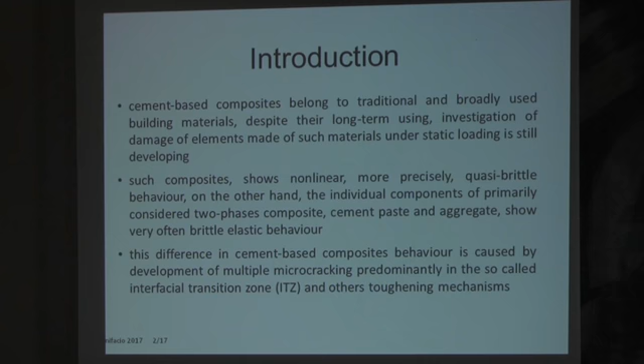So, about the experiments. For the study, we selected two fine-grained cement-based composites. In the table, you can see the composition of these two composites. The composition was the same in the amount of aggregate, in this case only normalized quartz sand with maximum grain size of 2 millimeters, and the binder is the cement. The amount is the same in both mixtures. The difference is in the water to cement ratio, and the second mixture also contains the superplasticizer admixture. You can also see the basic parameters of the fresh mixture, workability and bulk density of these materials.

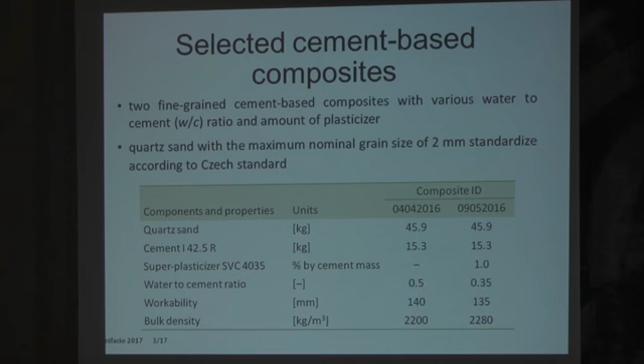From these mixtures, we prepared the specimens. The dimensions of the specimens were 60 by 80 millimeters in cross section and 1 meter in length. These specimens were primarily used for the measurement of length changes, the shrinkage measurements in these composites. After the shrinkage values were constant or did not change so much, approximately after 90 days, we got from these specimens specimens of dimension 40 by 40 by 160 millimeters, typical beam specimens which are used for fracture testing of fine-grained composites.

These specimens were provided before testing with a central edge notch, with notch depth approximately 1/3 of the width of the specimens. This notch was in the center of the span, and the span length was 120 millimeters. As I told, fracture tests were performed on these specimens. It was a fracture test in 3-point bending configuration, and the tests were under displacement control loading.

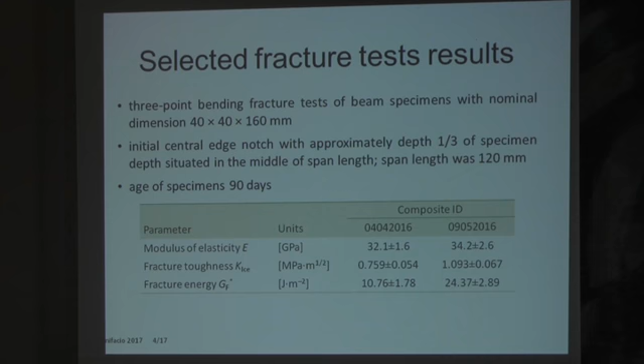It means we can record the load-deflection diagrams of these experiments, and these diagrams were evaluated. From the first almost linear part of this diagram, we estimate the value of modulus of elasticity, then using the effective crack approach we determine effective fracture toughness, and using the work of fracture value we determine the fracture energy. In the table you can see the values of these parameters, the mean values and standard deviation of 6 specimens for each mixture.

After the fracture tests were performed, we took the fracture surfaces of the specimens, and we performed microscopic measurements to look at the microstructure of the materials, mainly at the interface between matrix and aggregate. It was performed by scanning electron microscopy. You can see the pictures for both materials. It's by detection of secondary electrons, and the magnification is 5,000 times.

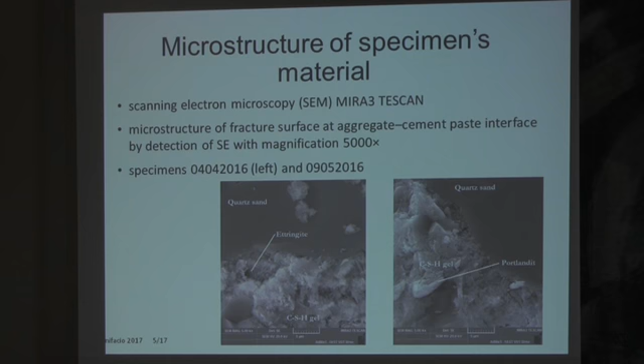You can see the quartz sand as the aggregate, and then you can see the interface. You can see the basic minerals which are in this area around the aggregate: ettringite, portlandite, and CSH gel. So, something about the interfacial transition zone. We focus on this part between aggregate and matrix. On the left picture, you can see a picture from literature. There is the aggregate, there is the interfacial zone, and then the cement matrix. So we are focused on this part, the part between the aggregate and the matrix.

So the other advantage of the microstructure measurement is that we can measure the distances, also in 2D, but we can use it. You can see on this picture, I hope. This is the grain of aggregate, some larger grain of aggregate. It's not so easy to define a constant thickness of the ITZ, because as you can see from the micrographs, there are different structures around the grain, and it's not so ideal as in this picture, where there is a constant thickness of ITZ.

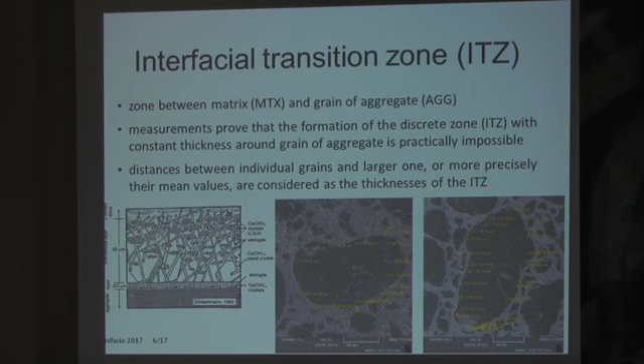So now something about the modeling of the interface between matrix, ITZ and aggregate. It was performed by software ANSYS. It was made a simplified 2D model which goes from the three-point bending geometry. In this geometry was tested our specimen, and the crack tip is on the interface between matrix and ITZ.

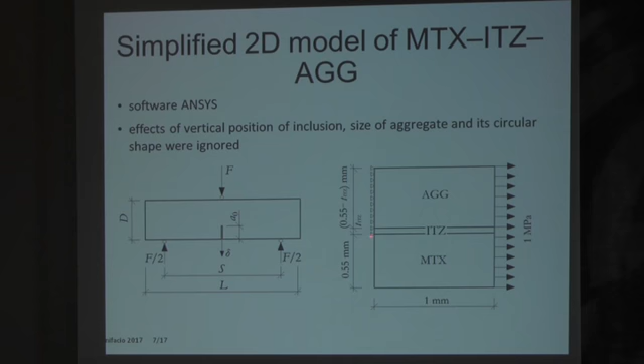It means when we loaded the specimen, the crack grows from the initial notch, goes to the matrix, and we model the interface between matrix and ITZ. So the materials were considered as linear, elastic, and isotropic. They were defined by their elastic constants, Young's modulus, and Poisson ratio. As I told you, the thickness of ITZ was taken into account from the microscopic measurements.

The modulus of elasticity of matrix was taken from the fracture experiments which we performed, and modulus of elasticity of ITZ was determined using so-called generalized self-consistent scheme. It was taken as half of modulus of elasticity of matrix. Modulus of elasticity of aggregate was taken from literature, and also the Poisson ratios for materials were taken from the literature.

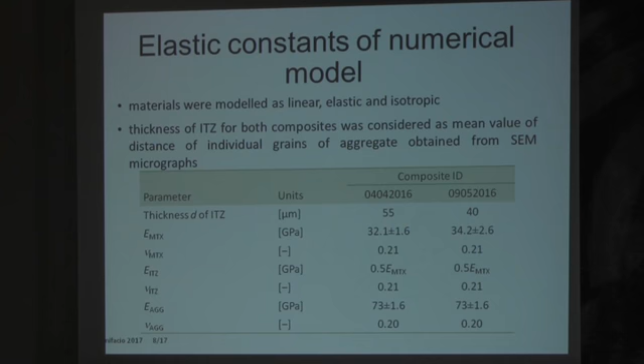We also did some parametric study. We considered the change of the matrix modulus of elasticity. We take mean value and 5% and 95% quantile. Which parameter we monitor? For quantitative description of influence of ITZ on stress state in crack tip vicinity, we evaluated opening stresses. It was a mean value of opening stress and the stress range determined according to formula.

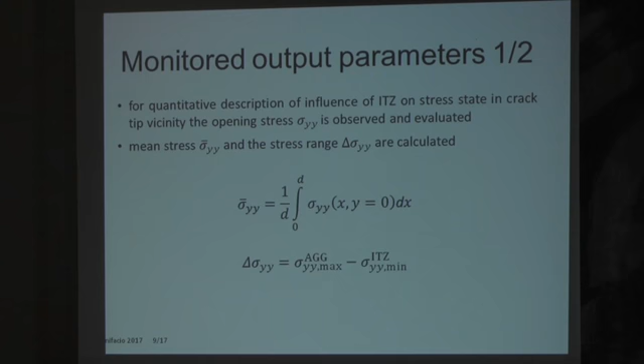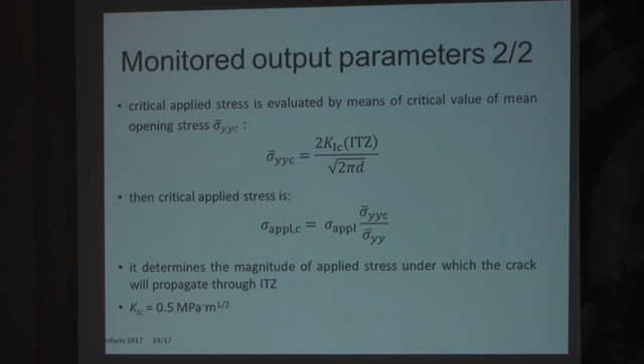And then we look at the critical applied stress, which was evaluated by means of critical value of mean opening stress. The first formula is for critical value of mean opening stress, and from this we calculated the critical applied stress. It determines the magnitude of applied stress under which the crack will propagate through ITZ. For this estimation, we considered the fracture toughness 0.5 megapascal per meter square root, because it is a typical value of fracture toughness for cement matrix.

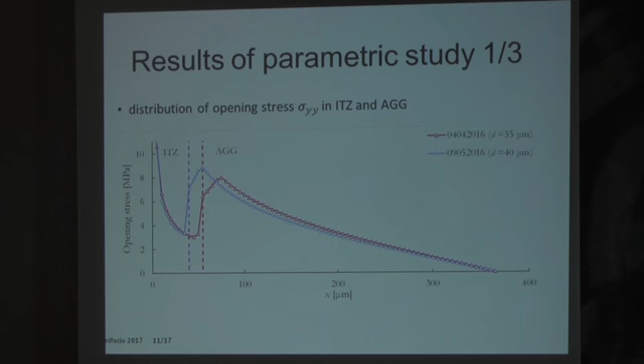So there are some results of our study. There is a distribution of opening stress through the ITZ and aggregate. The dashed lines are the interface between these two phases. For the first composite the thickness of ITZ is 55 micrometers, for the second is 40 micrometers. So, as I told you, we monitor the following parameters. They are for both composites in the table. The upper are for the first, and the lower part are for the second composite.

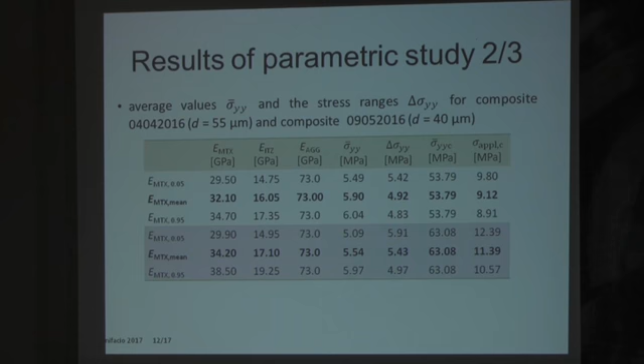Both are the mean values of matrix. As I told, we calculated the parametric change of the matrix modulus of elasticity. There are the values of critical applied stress dependent on modulus of elasticity of ITZ. I don't know how to say it, I forgot. When we have the biggest value of modulus of elasticity, the crack propagates more.

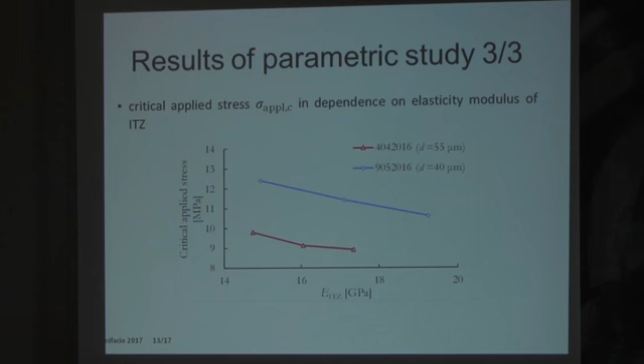It will be better to go to summary. We evaluated influence of ITZ on stress distribution in cracked specimen. Crack tip was located at the interface between matrix and ITZ. We evaluated influence of various ITZ thicknesses and various elastic moduli of ITZ on the near-crack tip stress field, and also the critical applied stress was evaluated.

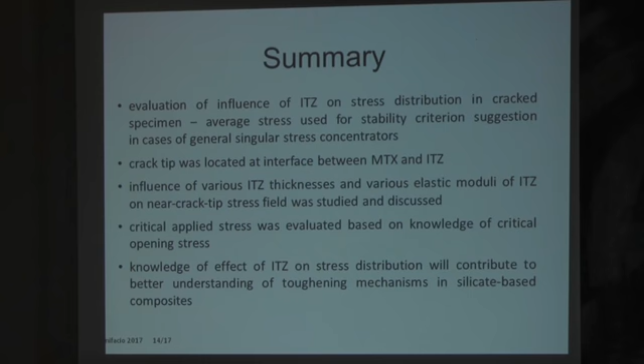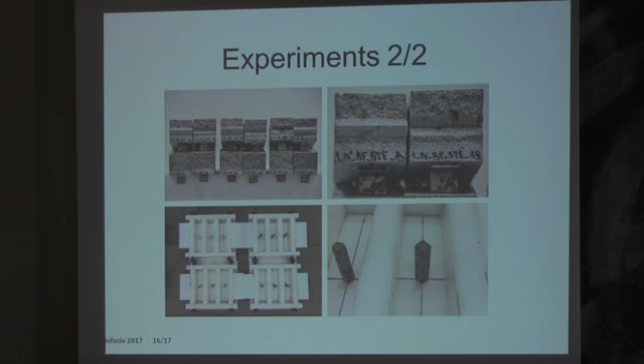It's our future work. So thank you for your attention.